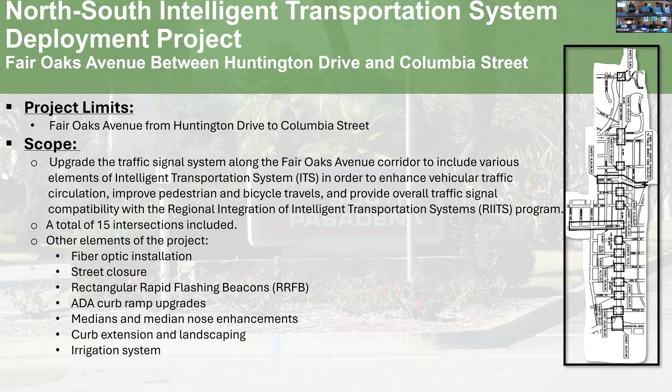Obviously, when we start touching an intersection, by law we are required to upgrade it or bring it up to date with whatever is needed. Along with the intelligent transportation system component, other elements of the project include fiber optic installation, a street closure that's more like a cul-de-sac closure, and installing a rectangular rapid flashing beacon unit at one location. We're upgrading the curb ramps to be ADA compatible, adjusting median noses at some locations, and adding curb extensions and landscaping. We'll explain all of that as we go.

I have a question, sorry to interrupt. Is that $1.1 million included in the 10 million? The design, the 1.1 — is it included in the 10? No, it's additional, on top of the 9.34. Okay, thank you.

We are on a very tight schedule for this project. We have to complete construction by end of June 2027. The 50% design was just received on August 15, and our comments are due back to the consultant by August 29, end of this week. 90% of the plans are due by September 19, and the environmental document must be completed by October 24. The 100% design final review is due by November 3rd, and the 100% design itself is due by November 27th. Construction must be completed by June 2027. It's a very tight schedule, and we're getting everybody involved.

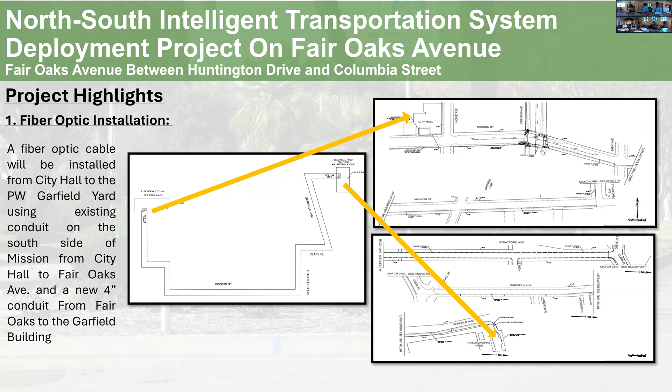Fiber optics is very expensive, so that's probably taking a good chunk off of the budget.

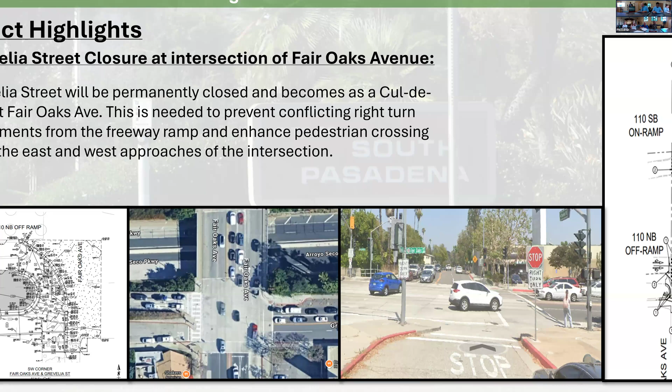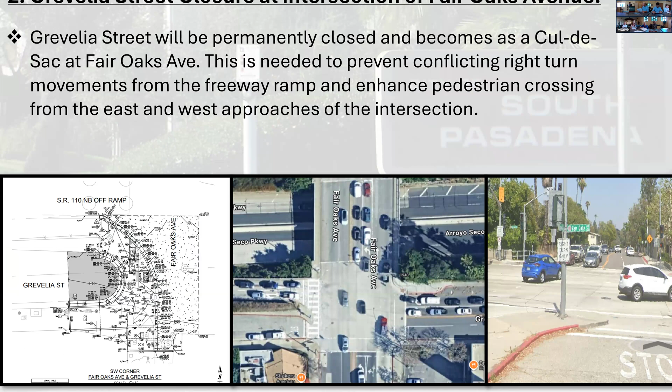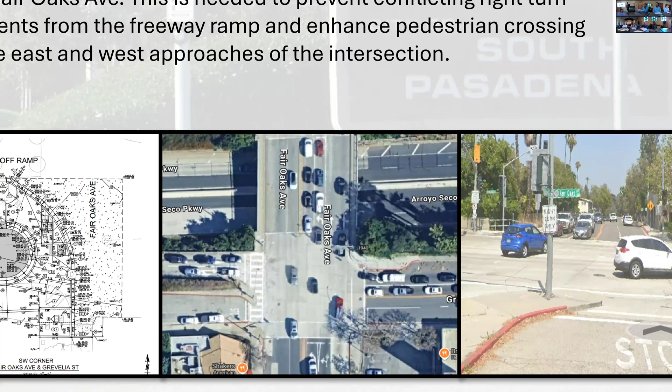Grevelia Street closure at the intersection of Fair Oaks Avenue - probably all of us know this little hole here on Grevelia at the intersection of Fair Oaks. This will be closed as part of this project and turned into a cul-de-sac. The reason is it's quite an unsafe maneuvering we're experiencing now, as traffic coming from the freeway conflicts with this particular traffic coming from here. Also, pedestrian movement crossing the street here is a little confusing, and we believe closing the intersection and making it a cul-de-sac will help improve circulation in general, eliminate conflicting movement with traffic from the freeway, and improve pedestrian crossing for that intersection.

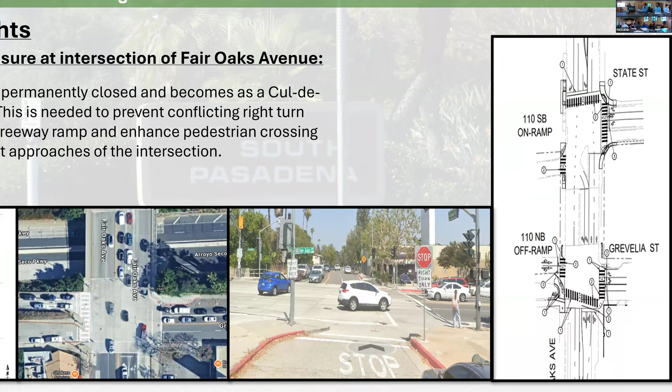So this is the proposed closure here - this will be a cul-de-sac, and we're going to have continuous sidewalk. We'll be installing a semi-diagonal crosswalk. This shape helps enhance visibility for motorists coming over the freeway - when you have it at an angle, it really helps enhance visibility of pedestrians in the crosswalk better than the existing straight line.

Wasn't there a thought at one time to use Grevelia, that portion of it, for a third lane for the off ramp from that freeway? Based on our limited communication with Caltrans, I haven't heard anything about a widening of that route. To us, it makes a lot of sense to close it, especially since you hardly have any traffic there, and we probably have future plans there - we'll be working with the developers for that area on what we do.

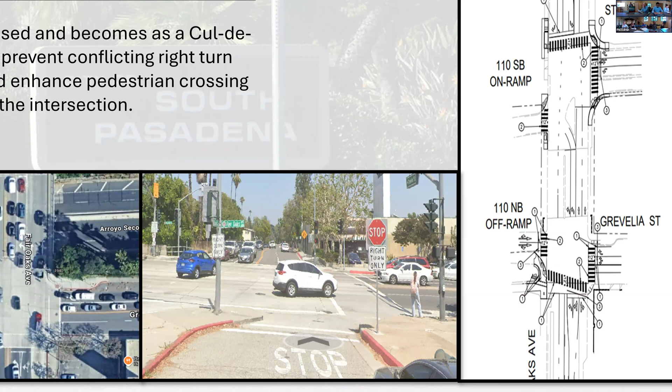The north-south project really took into consideration some of the recommendations that came out of the tool report. We tried to incorporate as little as possible from the tool report because we also have this very big project coming up soon, the Huntington Fremont street improvement, which is literally covered by the tool report - and by the way, tomorrow is the deadline to submit it. Part of the reason we're not doing a lot of modifications for our project at Fair Oaks and Huntington Drive is because that's a big chunk of what the tool report project will be doing.

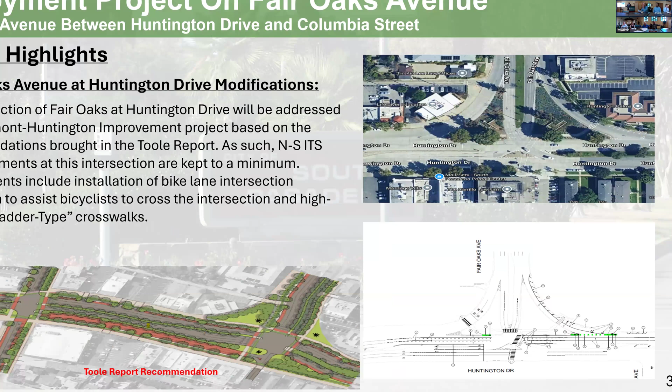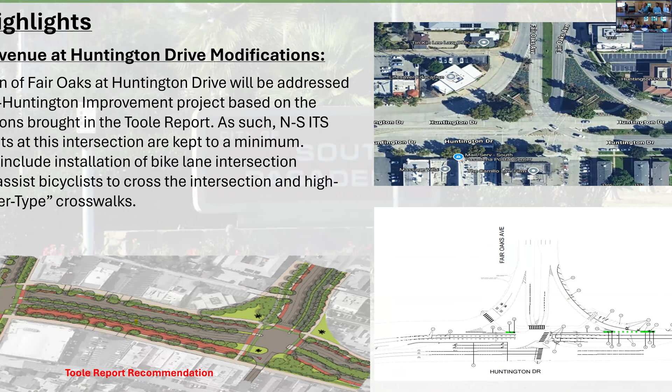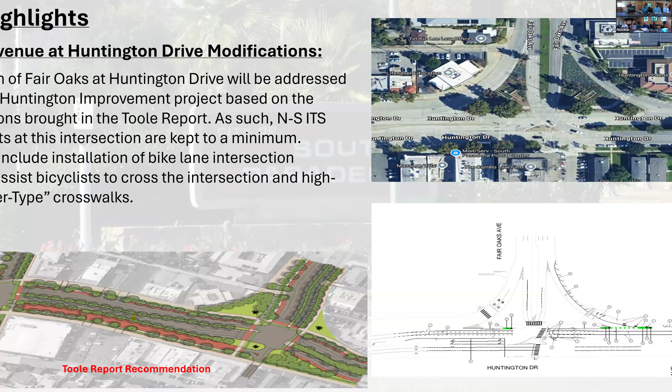For now, what we're doing is simply improving visibility by installing a high-visibility crosswalk, and adding just a little extension of the bike lane to guide traffic through these maneuver movements. The rest is coming - this is a picture from the Toole report showing what they propose to do, so I put these right next to each other to show you what's coming up as part of the Huntington project. Until that's constructed, this is all we're doing at this intersection.

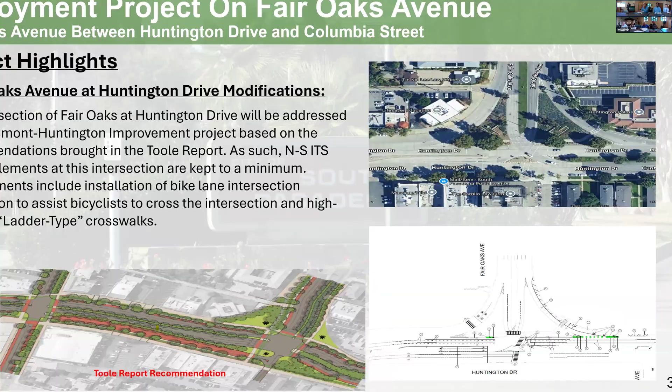So you said something about a bike lane? Not a bike lane, but an extension of the bike lane with the green, just to guide the bicycle through the traffic because of that free right turn here. But that's just for this project - the Huntington Fremont project will incorporate a full bike lane. Okay, because I don't think there's any bike facility there currently. No, it's really an additional safety measure - just conflict striping, that's it.

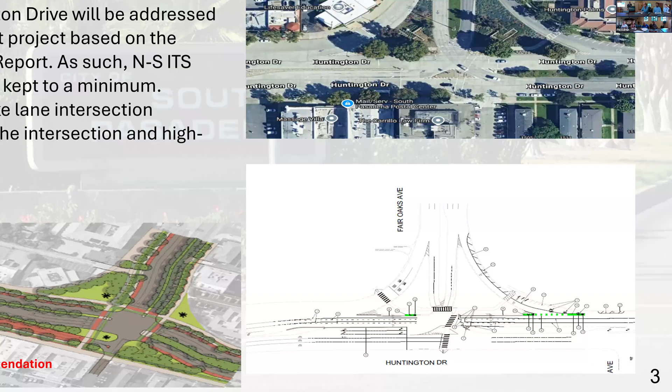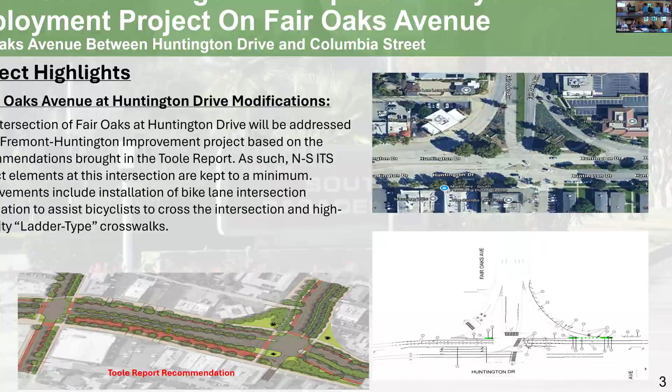Is that customary when you don't have a bike facility? Very good question - we asked our consultant the same thing, and it's not customary, but it's not unusual. What we're simply trying to do is tell people, if you already have a bicycle on the street, maintain your same line, you don't need to merge to that or anything - stay on your line while crossing the intersection. It's just an added safety feature, it's not going to harm anyone. It's really beneficial to guide them through this unusual intersection with all the turning movements.

So the only thing going on at that intersection with regard to this project is the pink? Yes, that's it, exactly what you're seeing - from here to here, and then that little piece here to guide them through. Okay, thank you.

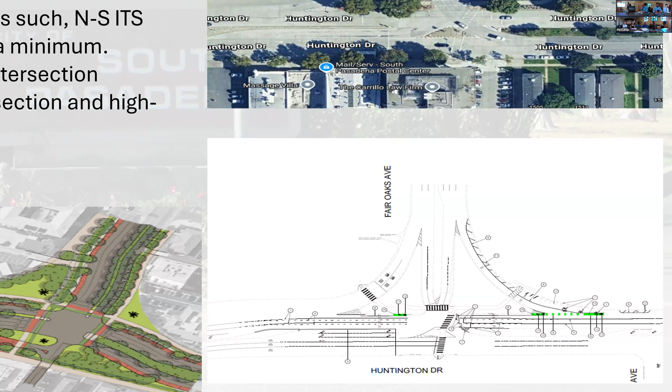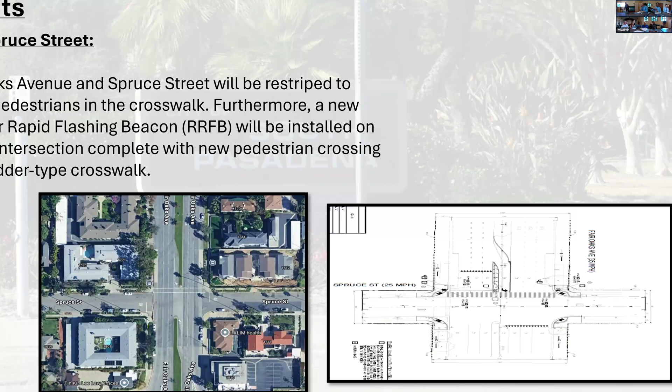That's one we got a lot of inquiries about, how to improve crossing from this particular intersection. Right now this is an old photo, but we've already installed the ladder type, high visibility crosswalks that exist currently. With this project we will be installing a new RRFB unit for the entire street, for both directions of traffic.

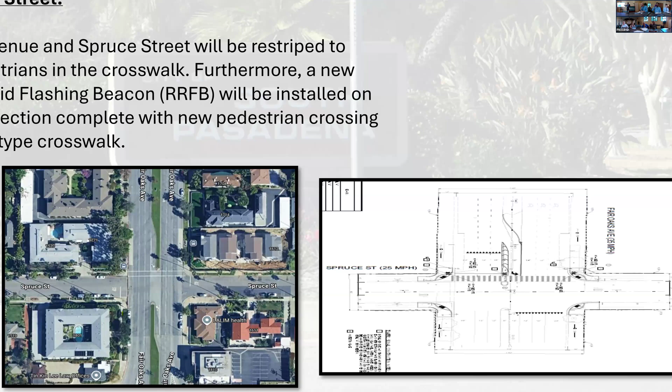That's the first block north of Huntington, at the intersection. This one, originally in the proposal, or as discussed at one time, they were thinking of a HAWK signal. However, the HAWK signal requires a study.

Based on the numbers we got for pedestrian traffic, it will not meet the requirement. So we decided to put something else: the RRFB system, push button only process.

Could you, in 30 seconds or less, explain the distinction between HAWK and RRFB? At a high level, what is the difference? The HAWK system is the one where you see a mast arm in the middle of the street with four or five lights. It has different phasing for flashing red and solid red. It's a bit more complex, really a signal system.

While the RRFB unit is also a signal system, because you use a push button to control it, it's a simpler unit, and it's solar powered, by the way, so there's no electrical wiring involved at all. It's just the unit you see with the pedestrian sign, and then the two flashing beacons. But you could put an RRFB overhead.

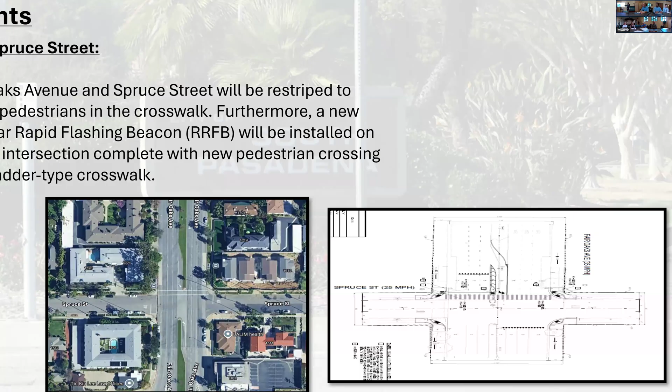And an RRFB is just - is it only on the sides of the street, or is there an indicator in the median as well? Right now we're proposing it on both sides. But nothing in the middle? It'll be facing both directions, both sides. But just on the curbs, not in the median? No, I'm sorry, my apologies - yes, it is on the median.

Okay, that's better, because it's wide - we've got six lanes of traffic. I didn't know if it came, because we mentioned that and originally the consultant wasn't going to put it, so I didn't see that he did. I vote yes. Okay, yeah, it'll be there.

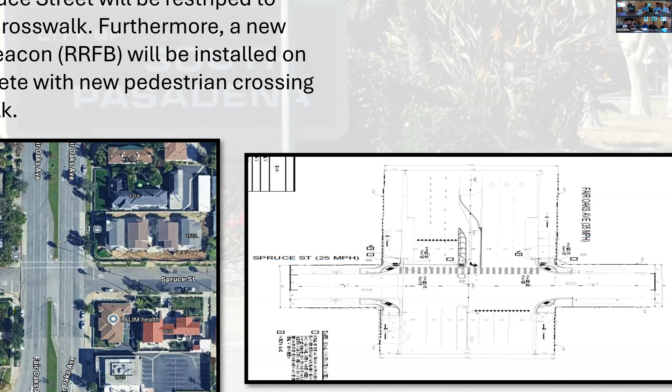Thanks - I'm sorry, you said it didn't qualify for a HAWK system? Yes, it did not. The HAWK system requires a study that requires at least 20 pedestrians in the crosswalk within any one hour of the day. We don't have that much volume there.

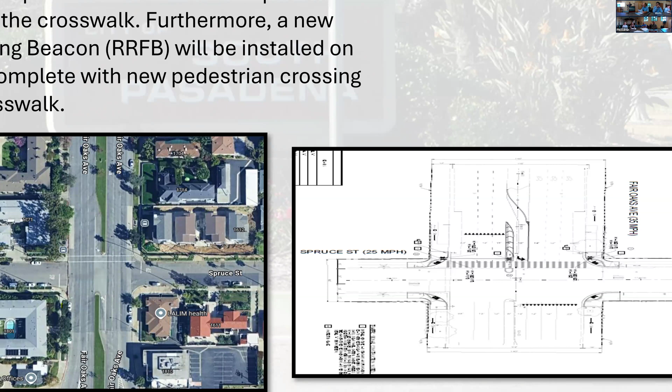In general, I'll give you my opinion from my own experience: I find the HAWK system to be very confusing, not for pedestrians, but for motorists, because of what Commissioner Fowler mentioned - the way the signal goes from one phase to the other, flashing red to red, then yellow. It's really confusing, and I'm not sure our motorists are fully aware how the system works. It's also very costly - almost as costly as a new signal system. So, not meeting the requirement and with all these other complications, it's a lot easier and more practical and understandable to everyone to use the RRFB system.

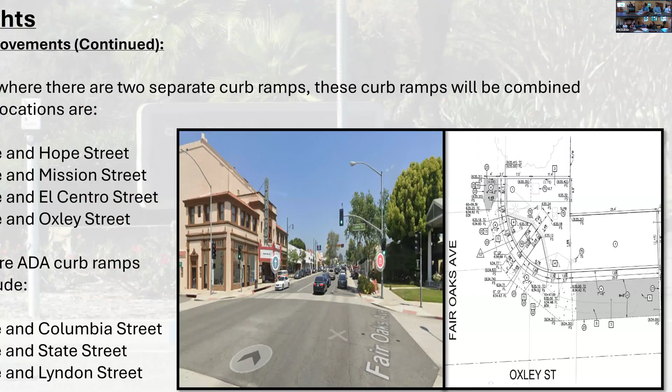Why? Good question. If there are two existing curb ramps, is there some new requirement to do that? It's not a requirement that you combine them, as long as either one is compliant, but I believe it's really about trying to be consistent with what we have around the area. Some locations somehow ended up with two separate ramps instead of one complete ramp, and this is really our opportunity to make it consistent, even if the existing ones are technically okay.

But it's better to have two. And that's directional.

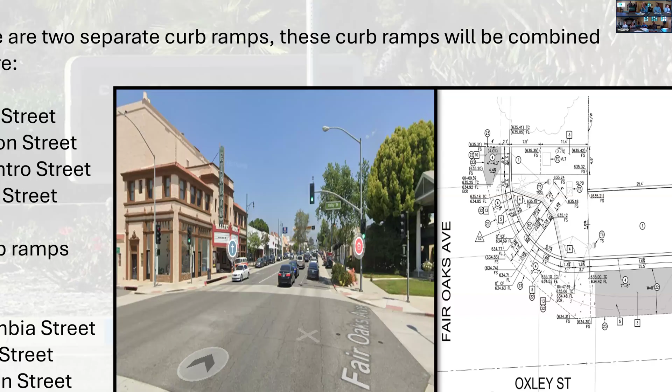We're kind of glossing over removing the curb extension, right? You're taking out the bi-directional ramp and putting in... is the footprint changing? Some places, yes, we're removing it. That's not happening on Fair Oaks though, right? The bulb extensions on Fair Oaks will remain or will be reconstructed without the corners, with radii going around instead.

However, at some intersections, for east and westbound movement, we will be removing them. Right, and this is just Oxley and Fair Oaks. If you look at Hope and El Centro and others, you'll see that as well.

We're also looking at adding bulb outs on Fair Oaks. So Columbia, for example, as you come southbound on the northwest corner, doesn't have a bulb out. In the 30 percent design report, they mentioned that the Columbia and Fair Oaks intersection has a very wide crosswalk, so adding bulb outs there would be beneficial. As we move to the next stage of design completion, that's something we've noted to our consultant.

No, this slide is really talking about upgrading the curb ramp to be compliant with ADA. But is this really an upgrade? If you're taking two existing ramps and just combining them into one, it doesn't sound like an upgrade, it sounds like you're just making it consistent with the others. Is there an overriding objective? Well, when we build it, it has to be up to ADA standard.

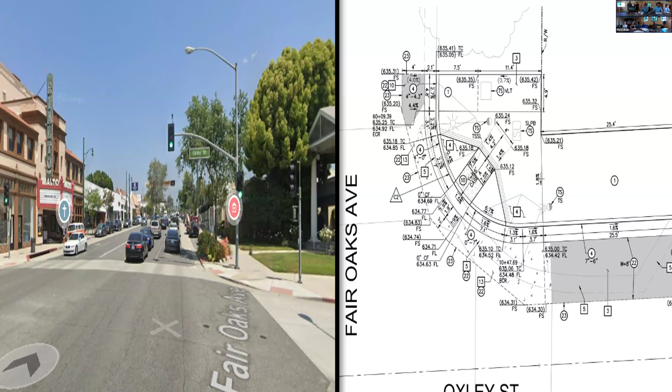It may also be a conflict if a disabled person is using a single curb ramp in the middle, you're being thrust out into live traffic conditions rather than being guided into the crosswalk. So I'm curious why we're doing this and spending money on it when, is there a problem with the existing curb? Is it not ADA compliant?

I cannot answer for sure if the existing one is compliant with ADA, I can check on that. But my concern, if I may, is that for this specifically, the locations of new traffic signals will conflict with the bi-directional ramp, which is why it's being combined into one. Across the street, we're maintaining two.

So where we can maintain two ramps, we're maintaining that. But in a new corner, if there's a conflict with where the traffic signal foundations for the new standards or other traffic signal hardware need to go, that's where we're seeing if we can get down to the one-ramp program.

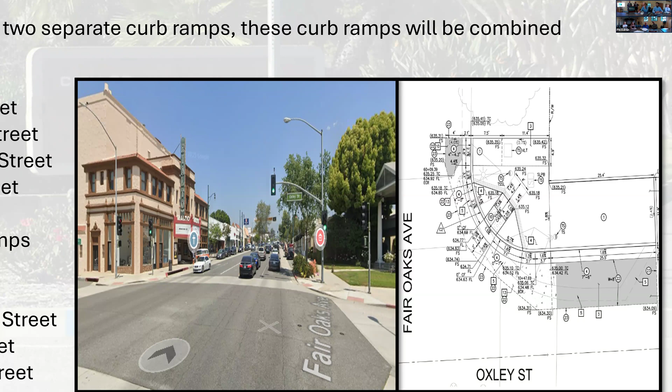So for new poles, new foundations, pedestrian push buttons, all that infrastructure has to fit into that corner within the distance of the crosswalk. We'll revisit this corner with our consultant, and in fact all the corners we see here, just to double check. But based on the plans and where the pole foundations are, that's what I'm gathering.

That's nothing that ever came from the commission, so I guess the consensus is: if we need to do it, we do it, but if we don't need to, we don't. And if we are changing it, the goal would be to replace it with two ramps if possible.

So wherever we're rebuilding, you'll see two ramps being put back in. This one in particular, with where the new foundations are going, is why they have to go to the one-ramp program. We'll revisit it with them again to double check, but from what I see on the plans, that's what I'm seeing.

Do you know what's in the updated public right-of-way accessibility guidelines? I know they were in draft form, but I thought they were being adopted. Was PROWAG officially adopted? In practice it hasn't been adopted officially yet, though NACTO uses it and it's becoming a widely used practice, more stringent than the ADA requirement, but it's not officially adopted by the state of California, by Caltrans.

What we're trying to do is be in line if this becomes standard - what we're doing with the new curb ramp will be PROWAG compliant. I don't think the new one-ramp configuration will be as good as the two-ramp one.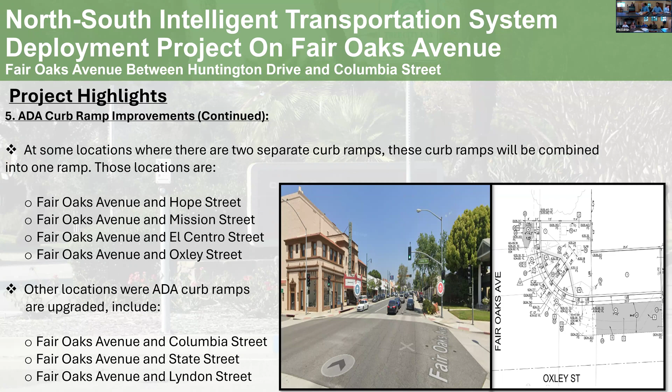Median nose modifications: at some locations along Fair Oaks, we have configurations where the median nose and the left-hand turn pockets are not aligned properly, as you can see here. So in this project we're cutting the median nose, narrowing it to about 2 or 3 feet wide, and widening the left-hand pockets so they can be aligned with each other.

I'm going to ask the same question as before - why, and what difference does it make? It's about visibility, improved visibility at the intersection.

For left turners, if vehicles are positioned like this, they'll be blocking each other in a way that you can't see through traffic. When the median noses are angled and aligned together, drivers can see past the other vehicle rather than looking directly at it blocking their view - that's the benefit.

That was an easier one. Yeah, so all of these intersections have that challenge. All these intersections will have this treatment: Lyndon, Bank, Rollin, Oak, Laurel, Spruce, and Huntington.

So, question for you. When you're doing this work, you're disturbing asphalt and removing concrete, right? Is the plan to just patch around where the repairs are made, or is there a greater thought about using this as an opportunity to resurface the street?

It'll be localized to what we're doing, because that part of Fair Oaks is a disaster. The Huntington FEMA project, when it comes, will really help, not necessarily on Fair Oaks, but there may be a bigger re-asphalting project we're doing with FEMA, and then we'll be looking at that location. Here, it's really a minor treatment—we're not going to disturb the intersection completely. It'll be localized around this specific point, and this area will probably be disturbed and re-asphalted after.

Just one other question, I think I know the answer but I'll ask it anyway. This section of Fair Oaks, right south of Monterey, has 3 lanes in each direction, if I remember correctly, and then 2 lanes in each direction north of Monterey. Has there been any conversation around reducing from 3 to 2 through lanes on Fair Oaks in this section? Not in this part.

That's the other one—really, the focus of this project is the intelligent transportation system, and we're adding all these improvements just to be compliant. I was going to say, why would this be included in the ITS project versus the Huntington Fair Oaks project? This specific intersection, if there's no ITS component to it, why is it included here? You're going to come back and repave and do all this other stuff.

One thing I know is that all this work we're talking about now is all on Fair Oaks. The other project, the Huntington project, will touch part of Fair Oaks, but not the entire street. So I thought you said that whole thing is going to be repaved. No, part of it will be part of the Huntington Fremont project. Fair Oaks is a separate part—we will not be doing major improvements on this project or the other one with the Fair Oaks project.

There might be some locations where it would be warranted, like what I was showing earlier at Fair Oaks and Huntington. That's because of the Huntington Street project coming, which is the bigger project. We left everything over there as is for now, so it can be part of the Huntington Fremont project. Here, we may not be touching those locations—I want to make that clear. This is not going to be touched, maybe in the Huntington Fremont project instead.

So the potential resurfacing of Fair Oaks and potential lane reduction—that's a project yet to be determined. At this time, no decision has been made. But in the future, there's more to come for Arroyo; this isn't the last thing Arroyo will see. I want to make sure we're all understanding that Fair Oaks will not be narrowed or heavily touched as part of this ITS project. I think that's good.

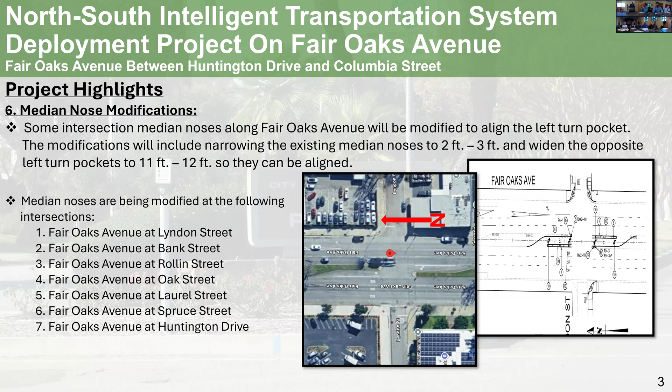Okay, other questions before we move to the next topic? Curb extension and bulb-out removal—that's your part. Okay, so we are proposing to remove some bulb-outs as part of this project. Let me run through those locations here.

The reason we're removing them is on the approach side and the east-west streets, to reduce the chance of being struck by vehicles and also to reduce delay for side streets. All these streets have one lane in each direction, and often a car going through, with a car behind it trying to make a right turn, can't make the right because the signal is red. We have all this space on the side—a full lane—that we can utilize if we remove the bulb-out and use it as a right-turn lane when needed. So it'll help really improve circulation.

Just to make it clear, we're not removing any bulb out on Fair Oaks Avenue, all on the side. Nothing on Fair Oaks will be removed. And with the removal of those, then you'll have new ADA accessibility.

No, it'll be two lanes. It'll be one, not necessarily dedicated right turn. If we remove the bulb out, we will be able to accommodate another lane of traffic. This bulb out is holding us from accommodating another lane, mainly for right turners. And it could be right and through, it doesn't have to be dedicated right turn either. So it'll be, for example, 2 through lanes, or 1 right and 1 through.

Literally, it will help alleviate backup and queuing of vehicles right now. Some of these streets are busy during rush hours, or even full time, so it is really an improvement to improve circulation. At the end of the day, when we talk about the ITS project, the entire ITS goal is to improve circulation on city streets by synchronizing traffic signals and eliminating as much stopping as possible.

So in line with that, yeah, you're trying to move the side street movement, and it's not something that's going to really affect pedestrian movement in any major way. This is only, let me explain, this is only a 40-foot wide street, and when we move that, 40 feet wide is the minimum that people can actually cross. Right now, with the bulb, it's probably 20 something. However, when we have signals, we can work out signal operations that will compensate for losing, or for extending those extra 10 feet.

Your crossing time will be longer sometimes. You can use an LPI system, lead pedestrian interval. We can also use the all-red phase signal that gives pedestrians an advanced chance to cross the street before the car signal turns green on the side street. So again, we're not just removing the bulb out without looking at the timing, which is a big component of the ITS. Obviously now we're adding 10 feet of crossing, at least, that's about 4 to 5 seconds extra for pedestrians, if we decide to go with the normal crossing operation.

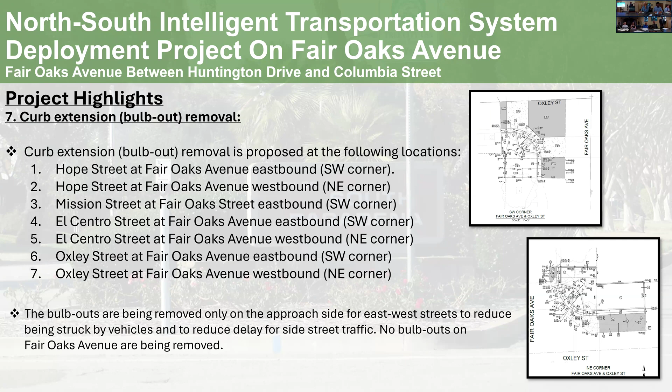So this is the last component of our ITS project, which is also irrigation and landscaping. Again, where we're keeping the bulb out, the better visibility issue is this one, because people try to avoid it - visibility is a big issue, they don't see these curb extensions. So instead of putting that ugly yellow sign that says 'head this way,' we decided to go with something nicer, pleasant, green, and put in these planters. Of course they'll be designed properly according to design standards. But it's going to look like this, not like that, right? Because that's where the directional curb ramp is.

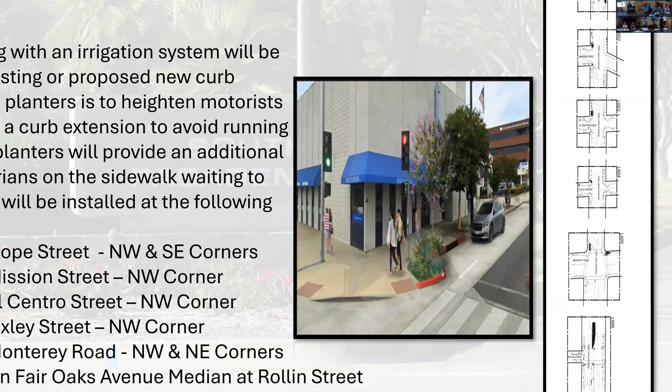And so you're gonna have one extension in this situation - it'll look like this. So those are the locations where we're gonna have the directional curb ramp. Okay, and so you're keeping the directional curb ramp there? Yes. Okay, and honestly, the more I look at the plans, for the directional bulb outs, I agree with Michael 100%. This is probably for the new poles, they have to adjust them, but I'll confirm that.

So this is the last component of our project: installing some of the green area beautification, green concept areas. Again, this will help improve and avoid hitting those curbs, and add beautification. Comfort for pedestrians as well, they get some shade and landscaping in the area. It's also a recommendation from the school design.

The ramps, or the bulb outs that you're proposing to retain, they have those very severe angles. Are the ones being retained going to be massaged, adjusted, rounded? As of now, one of our comments between now and 90% is for the consultant to look at adding radii instead of these sharp corners. I don't know where those sharp corners came from, probably before my time. So hopefully by the end of this project, all these curb ramps will have smooth radii.

Without these sharp corners, because there's drainage and various issues associated with those. Drainage is taken into consideration when we do these planters. They will look to make sure our drainage system is not affected. Yeah, drainage, debris, safety, all those. A lot of these curb ramps have catch basins right above them, this one as well. So that's a constraint - we could have made them longer, but we can't start modifying catch basins, so there'll be smaller landscaped areas.

It's something to keep in mind. Thank you. With that, I conclude the presentation and open it up for questions.

Thanks so much, Bassam, nice job. Before we continue our conversation, I thought maybe I'd see if we had public comment and invite them to speak.

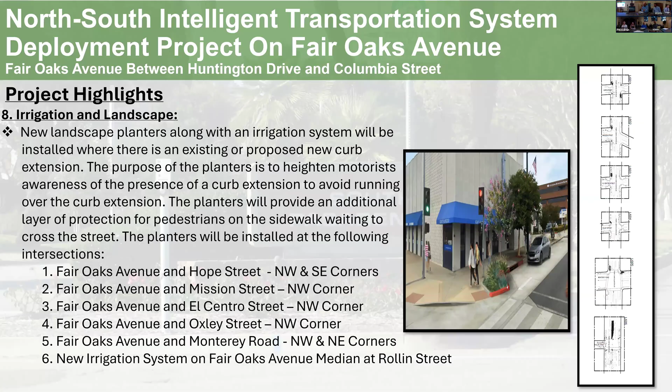So I feel like you've asked the right questions, and I hope that you can push back on staff's suggestion here and preserve the bulb outs. I'll say one other final thing. During the outreach process, there was a very moving public comment from a friend of mine whose kids have very severe autism. They try to cross the street independently to live independent lives, and that's not really possible if they feel unsafe. That's an example of why we build these things. It's not about throughput, it's about safety and people living independent lives.

Thank you. Phil, do we have any other public comment? Not okay, all right. And that's live and virtual, right? Correct, okay, just making sure. All right, so we'll close public comment.

The hot topic seems to be the bulb outs. So, we can do it any way y'all want. Maybe I just do one cycle around and get people's thoughts and feelings, to the extent not already expressed.

Yeah, so I'll go ahead and I won't repeat myself too much, but I definitely would support retaining the bulb outs that are currently there. The ability to improve the flow or ease of vehicles turning right, to me, from a residential street, is not as compelling as the need for improved safety for pedestrians and the overall pedestrian environment.

At El Centro, I'm at that intersection fairly often, and I've never seen a backup of people waiting to take a right turn from El Centro onto Fair Oaks. That just doesn't seem like a very compelling need, but to have an extra vehicle where you're trying to cross, if you're having 3 vehicles wide versus just 2 to contend with crossing, it makes for a less desirable, more exposed crossing for pedestrians. And so from that standpoint, as well as the overall streetscape, if you're right in front of Starbucks, having that extra sidewalk space as a buffer from vehicles is a benefit to the community over having more vehicles able to turn more easily.